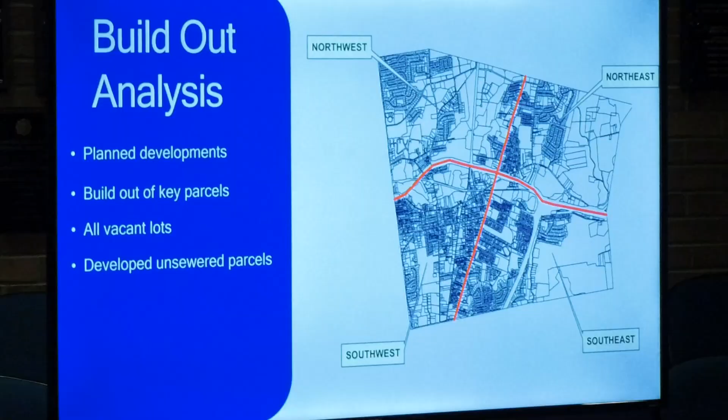So it included planned developments, build-out of key parcels, all vacant lots within the sewer service area - I keep stressing that because obviously there are sewer avoidance areas not included in this - developed unsewered parcels, there were a few of those, and sewer service extensions, again within the sewer service area.

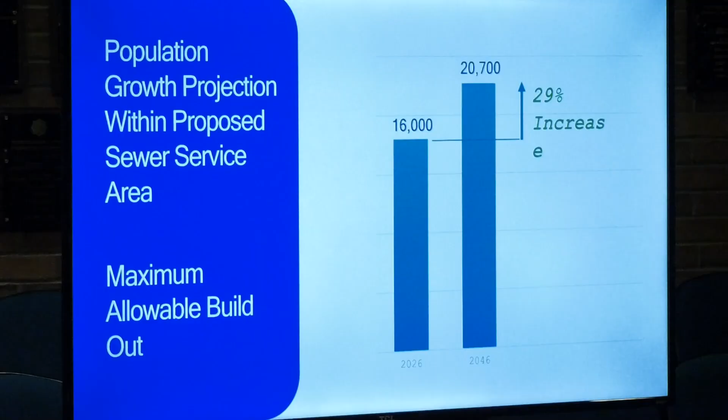Taking that, we then had a population which is currently 16,000 in the sewer service area. Over 20 years, taking all that growth information, we calculated a future population of 20,700, and that would be the maximum theoretical build-out in the sewer service area. I'll get to what flows that results in shortly.

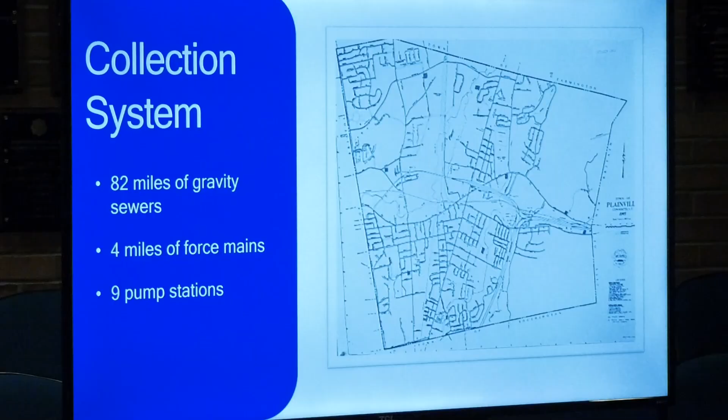While that was going on, we also began evaluating the collection system in its entirety. As you probably know, you have 82 miles of gravity sewer, 4 miles of force main - which is pumped, pipes under pressure from pump stations - and 9 pump stations, which collect and convey all of the wastewater to the water pollution control facility.

Same thing with stormwater inflow. There can be potential, not intended, but potentially illicit connections, perhaps a drain or something like that can find its way into the sewer, and all of that ends up at the treatment plant. During wet weather, it can be quite significant.

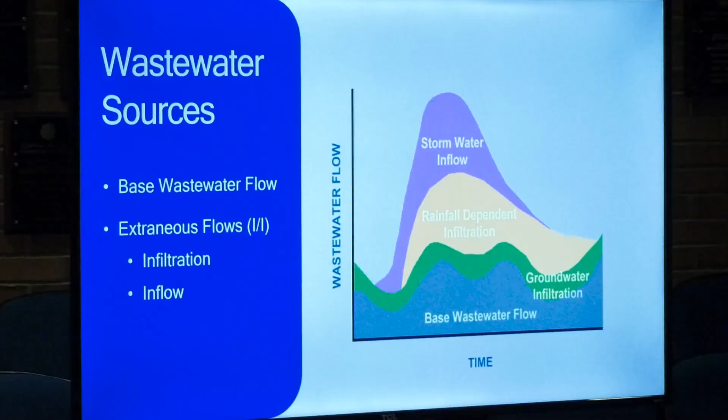When we think about base flow, for example, you can imagine everyone using the showers at 7 in the morning, you get quite a spike. Whereas at 2 in the morning, you get very little flow. So even over the course of 24 hours, that flow from residential, commercial, even industrial users in some cases, if all those peaks occur at the same time, you can see in that blue curve a rising and falling.

Similarly, when you have rain events, there's leakage from cracks in the pipe, as Al will talk about in a minute, but also from sump pumps. We don't often think about that, but a number of homes have sump pumps, and even though ideally they're not connected to the sewer system, oftentimes that's the case. That's why we see the events pile on top of each other during these wet events.

It's not unlike most utilities. If you think of water or electricity, you don't use it at a steady rate. So wastewater is just on the receiving end of this, and it arrives at peak times in peak amounts. To design improvements and to evaluate the existing system, you need to understand those peak amounts.

So it was a major part of the study. We were out there this time last year, starting in March, right through Memorial Day, collecting flow data to understand this. It was really understanding future growth and then understanding existing flows, and the variability of existing flows, that was key to this whole analysis.

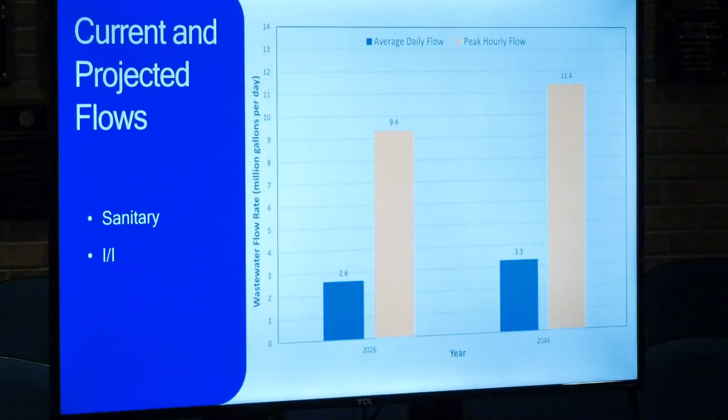And our future average daily flow is... sorry, I'm trying to find the slide... 3.3.

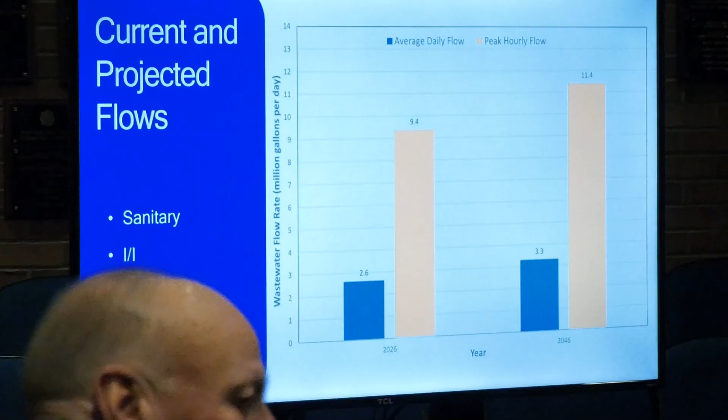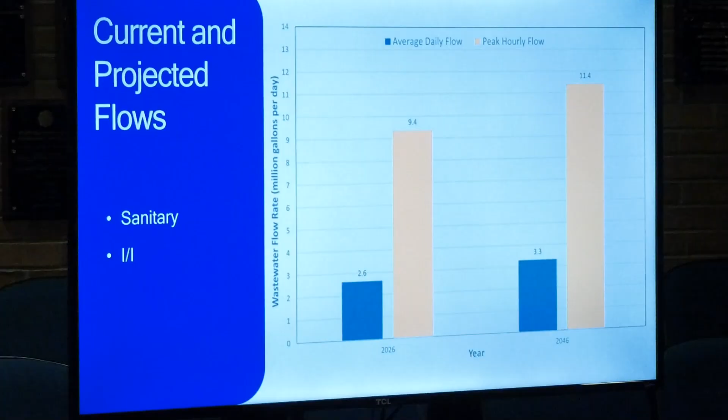One thing we'll point out later, but since we're on the slide, it's worth noting that the 2010 design, which was the most recent comprehensive design, the basis of the design was a peak flow of 7.5 million gallons per day. So even currently, the peak flows are exceeding what the plant was designed to handle.

And those differences, the blue is the average daily flow, and the orange is those peak flows we talked about, the wet weather events. And the infrastructure needs to be designed to handle the peak flows.

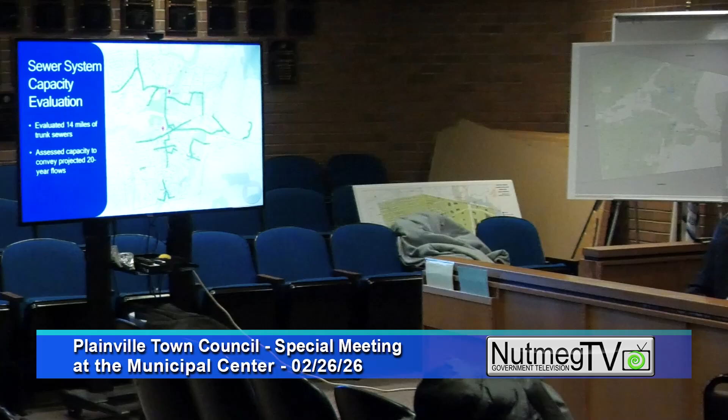So now we've got these flow numbers, current and projected, and we begin evaluating the capacity first of the collection system, so the pipes and the pump stations, but I'm just going to talk about pipes for now. We looked at the major trunk sewers in town because that's where the flow begins to aggregate and really flow through. We modeled 14 miles of trunk sewers for those flows, current and future.

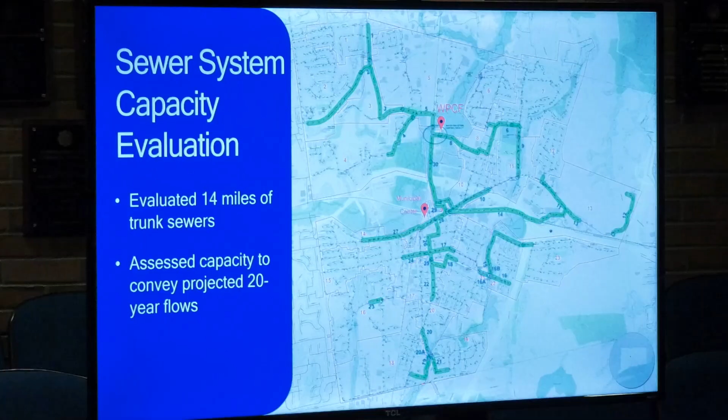And we assessed their ability to handle the current and future flows. So this next slide focuses in on what is a current or pending capacity concern.

The first one would be Journey Road, the pump station, and a section of gravity sewers associated just downstream of that pump station where it discharges to. That's number one, in case you don't know where that stuff is. So the Journey Road pump station is right here, and then you go up to the Cancer Treatment Center, Technology Park.

And then as you're heading down New Britain Ave, we have a section of pipe that needs to be upsized. It needs to go from 8-inch to 10-inch.

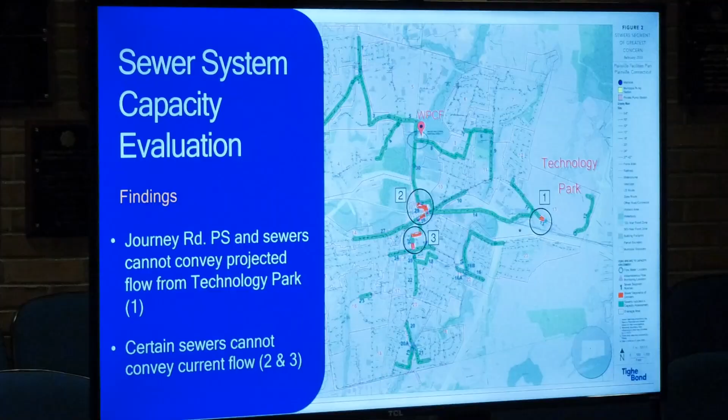I'm assuming with the PDD that was just approved by planning and zoning, is that figured into this? It is, this will get adopted by the POCD. We work with them, so we can't go into unsewered areas where the town has already said these are sewer avoidance areas. We're not looking to go into any of those, we're strictly dealing with the areas that we can develop. And this would be one of them, that's slated for development.

So that was a red flag in this near-term window, what we're saying, the first 5 years of recommendations, but this one's more critical than that because it's necessary if any development is to take place there.

And then areas 2 and 3, which are essentially about right where we are now, right near the municipal center. These are major trunk lines that are currently over capacity and currently beginning to surcharge or back up, not out of the manholes, but within the pipe. So they are having capacity concerns under current flows that would only be exacerbated as flows increase. They are in this 5-year recommendation.

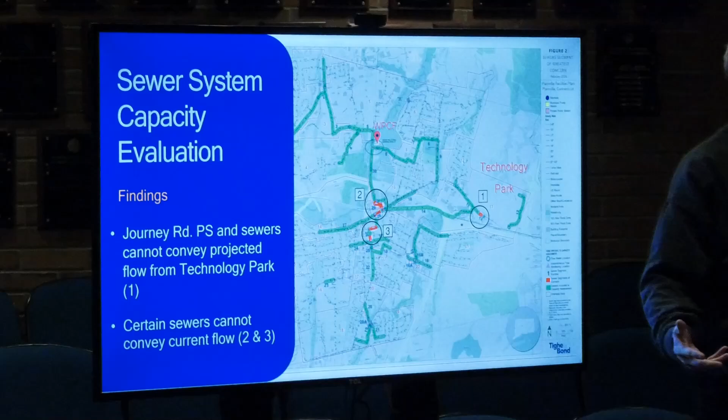Joe, anything you want to say about those? The flows from Technology Park have to flow through this area, it's the only way they're going to get to the treatment plant. They don't necessarily have to flow through this area, but we are having issues there and they need to be addressed. So these are the 2 areas we're looking to tackle first. Let's get these done because we know there's going to be development up there, and that development can't happen until we can accommodate it. Right now, we can't.

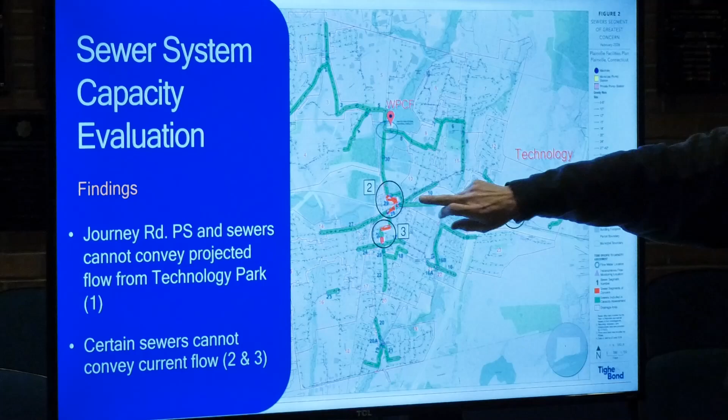Can you circle number 2? So this is going to be some front street roads, give me those street names. You get there at the train tracks and the crossing where the flea market is, that whole area. Everything kind of converges there and then cuts across and down to the treatment plant.

Okay, so that's in the near 5-year window. Then, this includes those sewers, but this is for the 20-year planning period. This is 11,000 feet, so approximately 2 miles, which is not a huge amount when you consider we mentioned before you had 82 miles. But these were all red-flagged as sewers with future capacity concerns if the growth happens that's projected in the 20-year plan, and it also includes the ones I just mentioned. I know without street names it's a bit difficult to tell, but they're mostly centered in this area near the municipal center, with the exception of one area up in the northwest section.

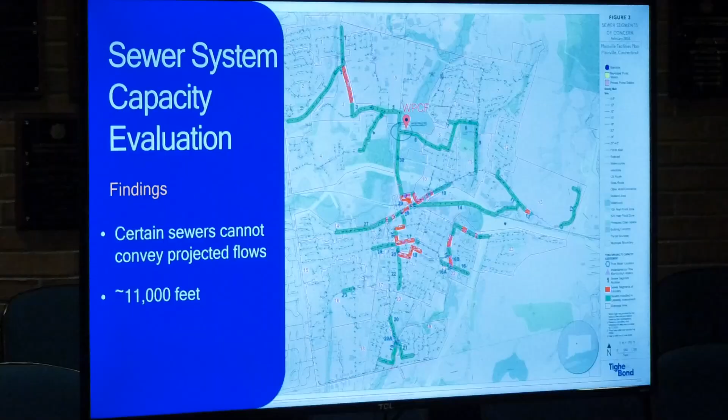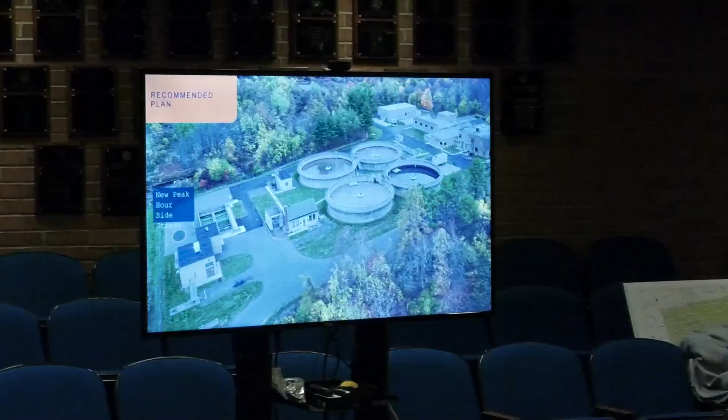So we're building a side stream headworks. When I say headworks, it's primary treatment, where you're getting the grit out and any large objects in the wastewater through a screen. We'll have a side stream for those peak flows so it has some help and can go around. That's the first piece of this, a new peak hour side stream treatment unit, just physical treatment, screening the wastewater, getting the grit out.

Constructing essentially large tanks that can store these peak flows. You gotta remember, it's a peak hour flow, it might last an hour or two. So the volume is big, but there's room on site to store it, keeping it from hitting the rest of the treatment system.

So what we're proposing here is actually using the existing primary clarifiers that are unused at the moment, using that for part of the storage of those peak flows. That's the first box on the left.

To the left, a pre-EQ tank. And then to the right, next to the old control building associated with the original plant, which is largely unused now, there are some things in there that will need to be relocated to construct another equalization tank. Together, those two tanks will attenuate those peak flows.

So that is a really big deal. That allows us to leverage the rest of the treatment plant without making it significantly bigger.

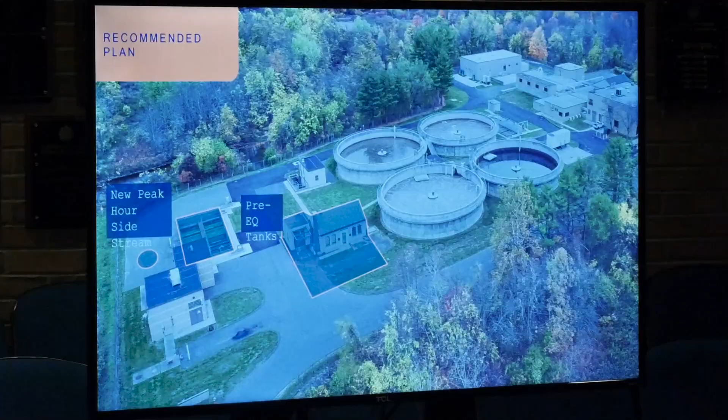How many millions of gallons or hundreds of thousands of gallons can you store until lower flows? It can store that peak flow of 11.4 MGD. One MGD is 700 GPM, so you're talking about 1,000 GPM over the course of an hour or two that you'll store. I can't do the math that quick in my head, but just to give you an idea, they're hundreds of thousands of gallons in tank volumes.

And it's honestly not that different. A lot of this, I don't know if you're familiar with the Hartford MDC, but they're a much larger plant over on Brainard Road, and they've effectively done the same thing, or it's near complete now on a much larger scale. So it's a common thing to do when you have the space, and we were fortunate that we had the space here to do this, to store those flows.

So now that those peak hour flows are stored, we can upsize the pumps that feed those 4 circular tanks. Those are your sequencing batch reactors, really the heart of the biological treatment process in the plant. We can make improvements to those SBRs within the same footprint so they can handle the additional flow and strength of the wastewater.

So we're just going to increase that. We're not going to push 11.4 through it, we're just increasing those to 8.7 MGD. That's as much as we can get through. So that's really the difference, the 11.4 peak and the 8.7 that we're going to be able to get through the treatment plant, if that makes sense. We're moving flow constantly through the treatment plant, it's just that delta that we need to store.

So they will get new treatment equipment inside those, including new pumps for air. It'll have new decanters, new aeration equipment. Really, those are getting old, that was 2010. So it's just refreshing all of that equipment and increasing its treatment size.